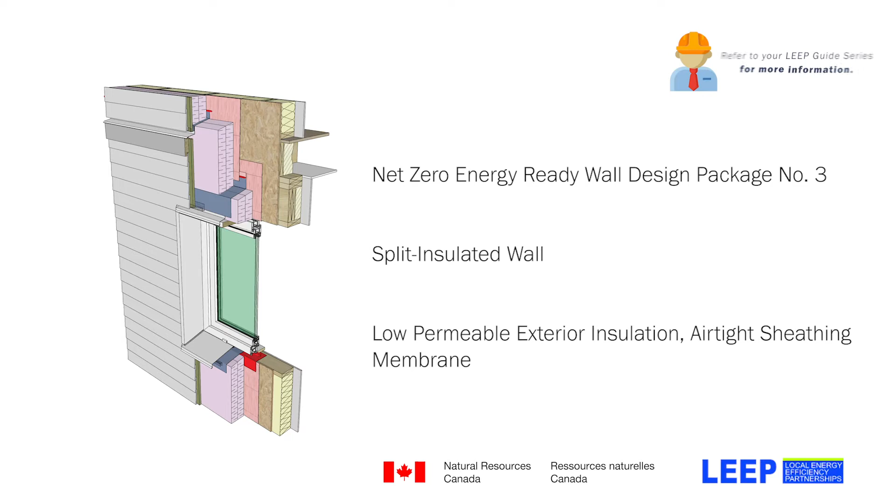So these guides, along with good process, all of a sudden, high performance is easy.

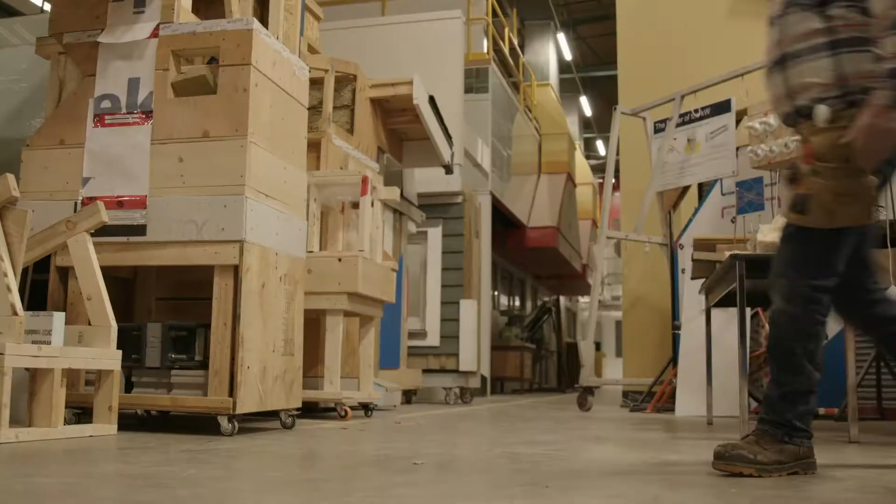You know, this rethink towards net zero is rethinking a lot of the traditional building enclosure assemblies and building them better. I get excited, but I also get depressed. I'm depressed because I'm old. And if I was younger, I would embrace this opportunity for this change. I see the young builders, and to me, I get excited for them.

Morning, Graham. Morning. Yeah. Hey, James, how you doing today? I'm all right, Graham. You?

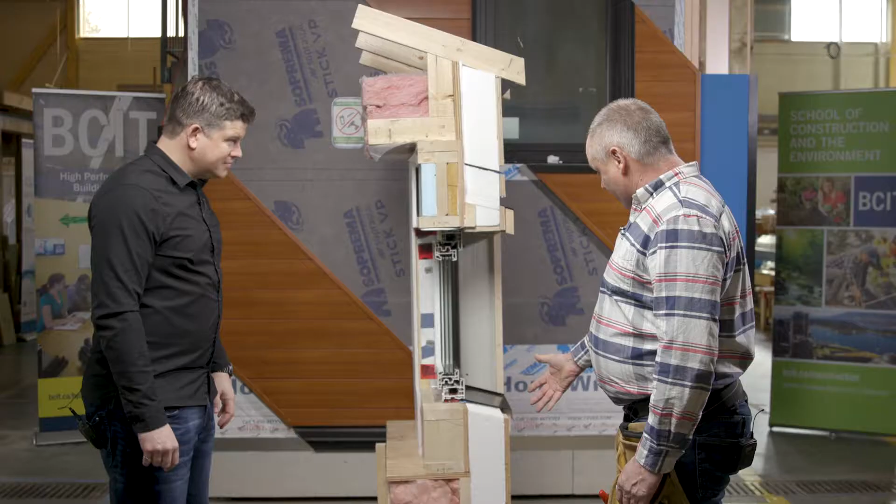Good, good. I see you built us a little mock-up here. I did. Can you tell us about it? Yeah. It's a split insulated wall assembly, pretty traditional. It starts with an ICF foundation, batt insulation on the inside with drywall and vapor barrier paint. So, you know, pretty traditional stuff.

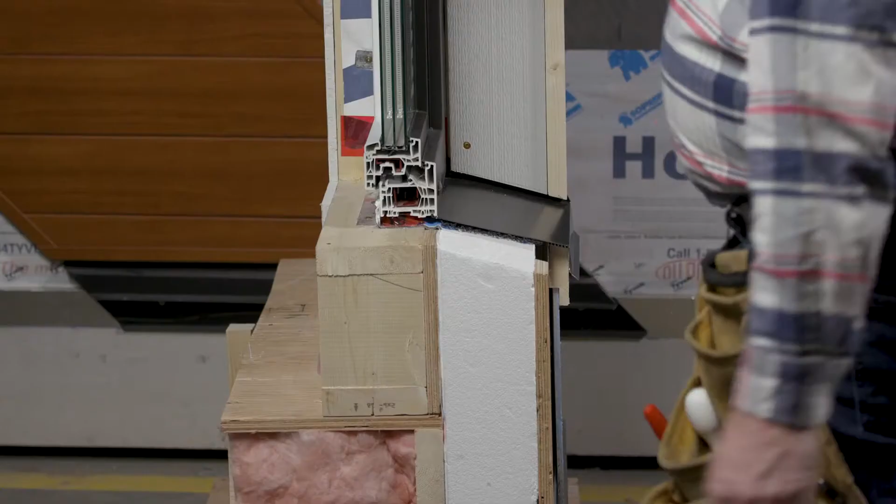2x6 framing. On the outboard side, I have 5 inches of foam. That's the split insulated assembly. The foam is grooved, and we'll get into that. But as far as the assembly goes, standard headers, and then I have a vented attic space. So again, nothing unusual. Same old wall assemblies, but a little more high performance.

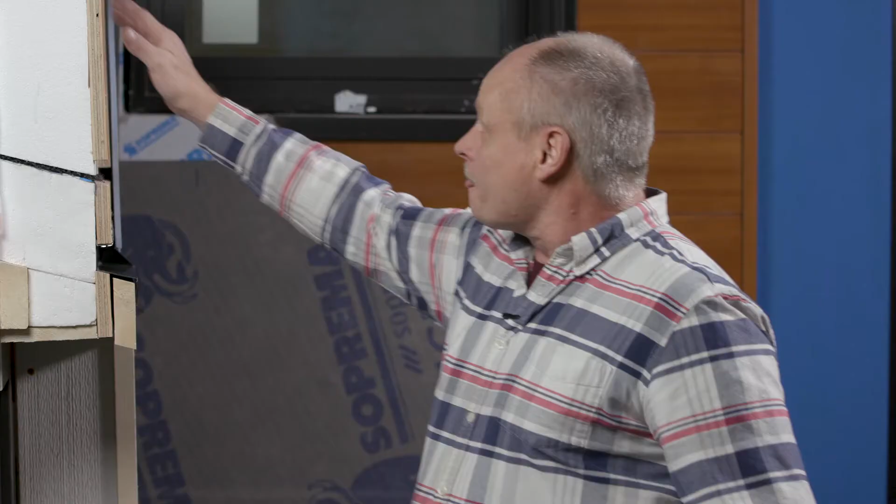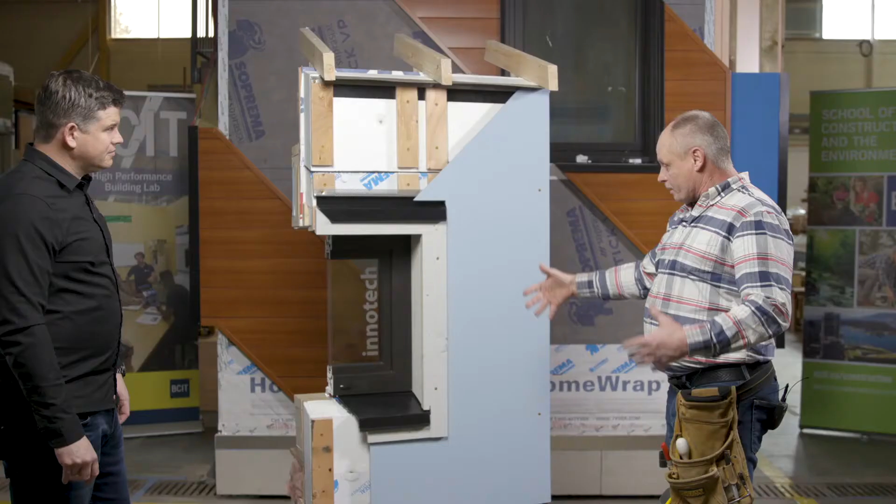Here on the outside, I have, let me spin that so you can have a little better look at what's going on. You can see it's just a rain screen cladding, strapping and cladding system. Pretty traditional, okay? And that's what I built for you to talk about. Great. Let's dive right in.

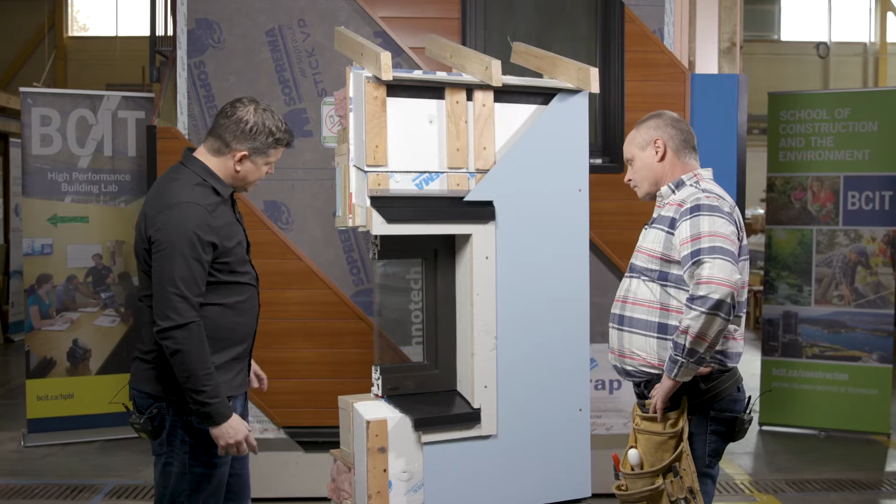Dive away. So we've got our LEEP wall system 3 here represented in this mock-up. And as you mentioned, we've got 5 inches of EPS foam or insulation over a 2x6 wall with a house wrap, air and water resistant barrier. Correct. So we're about our mid R30s, right about R35 or so for this assembly.

So from a water control standpoint, we've got our cladding, and we got our water shedding surface. And how are we controlling water with this insulation here? So a couple of things have been considered here due to the nature of the insulation and the wall types, and there's a whole thing that we can get into a bit deeper, but it's a traditional approach where I use a sheathing membrane, and that's the air and water control layer, okay? And the same thing applies, obviously, in the bottom half.

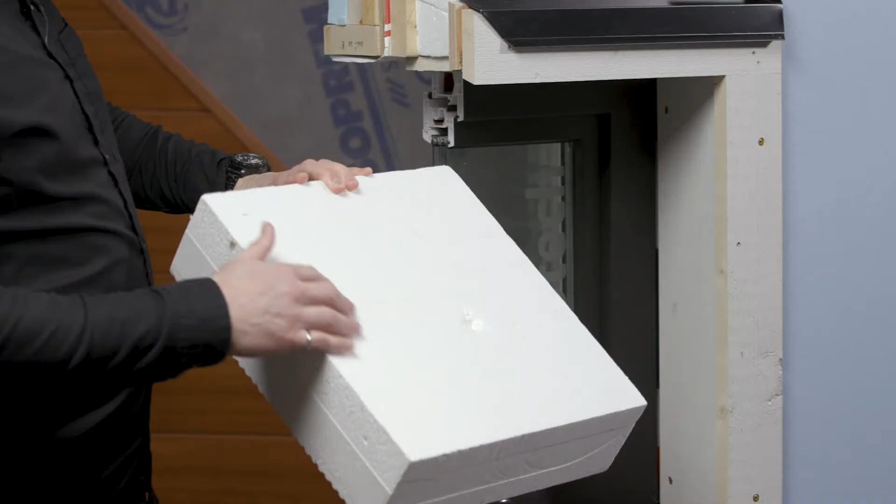The interesting thing is the insulation itself is actually grooved on the backside to allow for considerations of moisture within the wall assembly. Very simple. Do you want to show us some of that insulation? Yeah, I got a piece here, and there are many types, but that's it in its basic form. So we've got standard EPS, but we got grooves that are being cut in here. Lots of different types of groove patterns, but the point is just a place that can handle moisture.

Yeah. So what's unique about this assembly is we got a rain screen, but we got our foam insulation in our cavity over our house wrap, but we've got drainage behind the insulation. So if any water gets in during construction or in service, it can drain out. And you know what? There's other ways you can do that. Let me show you something else I brought.

If you don't have grooved insulation, you can use a very fine drain mat that would be attached to the wall and the insulation installed over. You can attach that with maybe stainless steel staples, tack it on, install the insulation. So the point is consideration to control moisture that could potentially end up behind there.

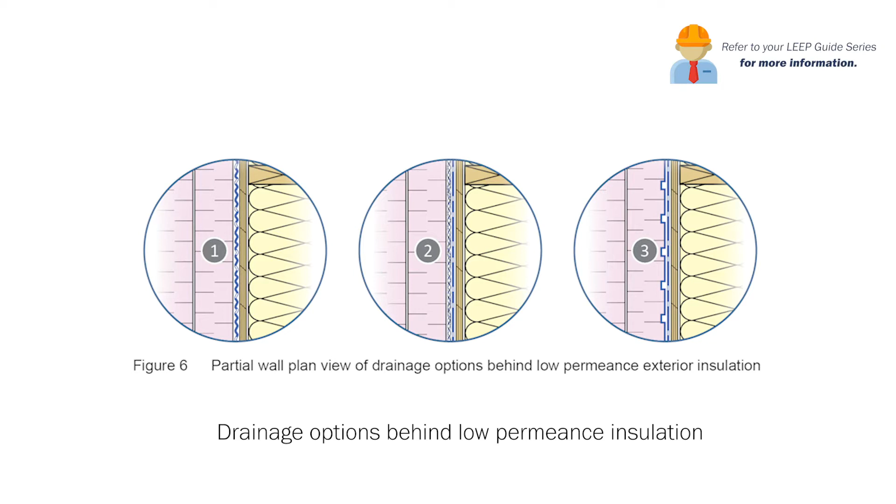And that's great because there are a number of builders that are concerned about putting foam plastic on the outside of wood framing, and this provides that buffer to allow an impermeable insulation to be drained and the water to get back out. Yeah, very much so. And there's just a lot to that, and I guess we're going to get into a deeper discussion on that, but how much are you putting on? Where are you building it? All this comes into play.

This allows you the flexibility to build a traditional split insulated wall with foam plastic. That's why I built this. Yeah. This is great. So when we look at this assembly here, we've got quite a bit of insulation on the outside. It's a lot, 5 inches.

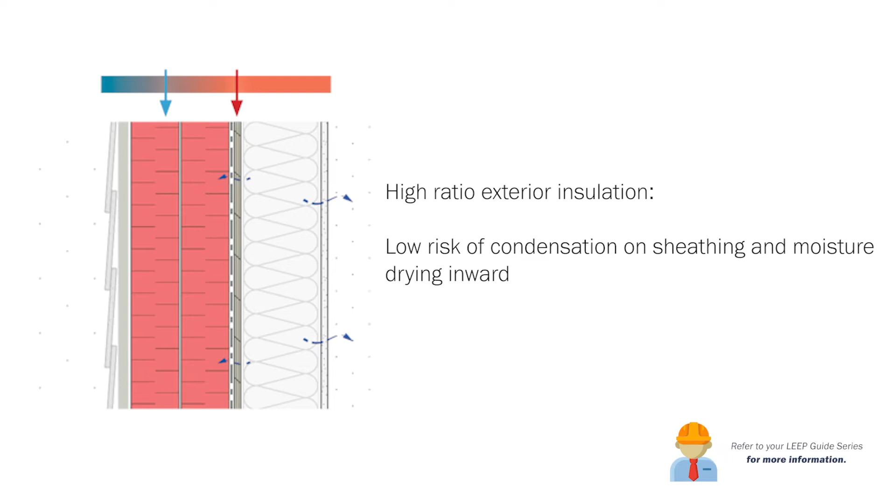Than, you know, a more conventional approach, maybe only a couple inches or so. Yeah. So we've got enough insulation on the outside here, so the ratio is quite high. We've got about R20 here and about R20 here, so we've got a 50-50 or so split. Yeah, exactly. Which in most places is going to essentially push your dew point into the outside of your wood frame assembly, but also keep the temperature here warm enough that you don't have a risk of condensation, and warm enough that it can dry out.

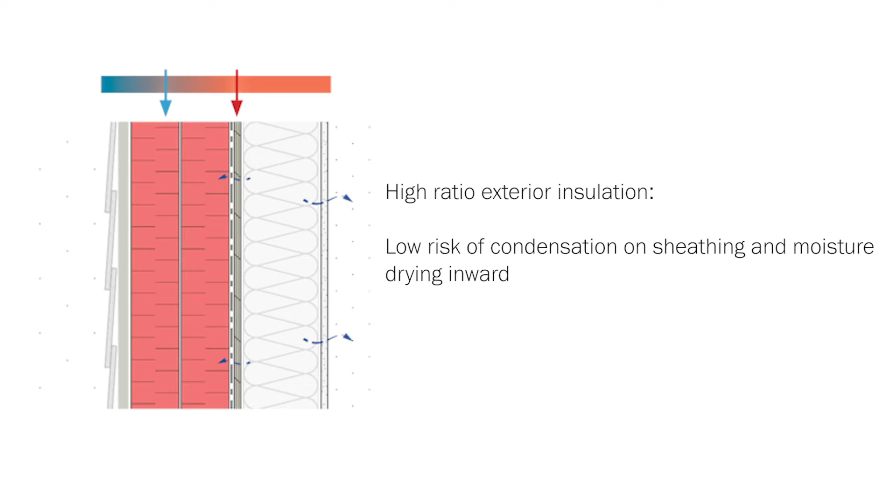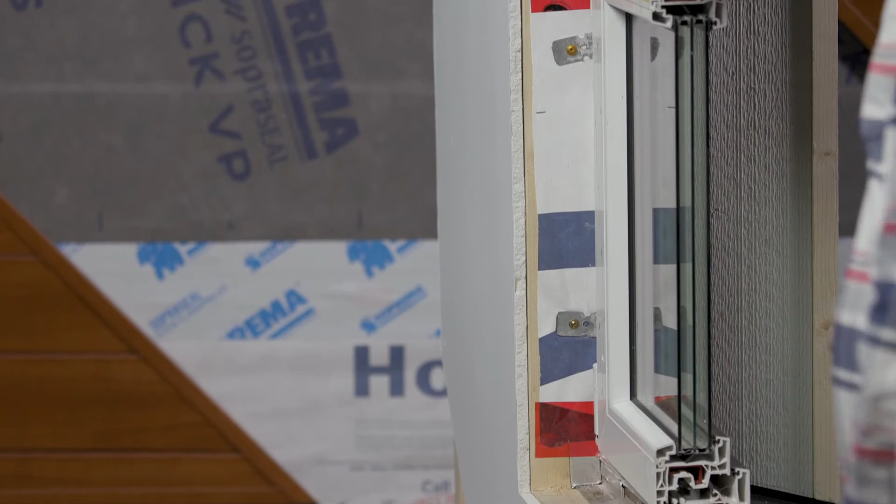That's correct. I also noticed that you don't have a vapor barrier on the inside. So what have you done here? On the back side of the wall assembly, you can see there's a vapor retarder paint on the gypsum as a measure of managing the interior to outside vapor drive. It also can allow some back drive and drying because it's a retarder. I didn't want to put poly in this assembly with foam on the outside. It's just not necessary, and it elevates unnecessary risk.

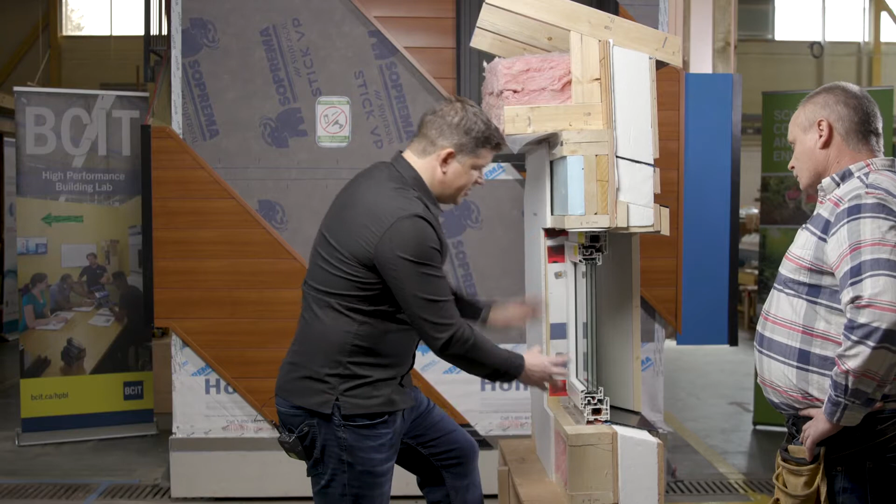That's great. So we've got a vapor retarder paint that controls the vapor diffusion through that assembly, but also allows it to dry back out. Yes. And what's really neat about this too, with this ratio of insulation, is we might not even need a vapor retarder anymore. Maybe. If we put in a bit more, or we're in a drier climate, we don't even need to worry about a special paint. This then becomes the control element, and the sheathing and the foam itself.

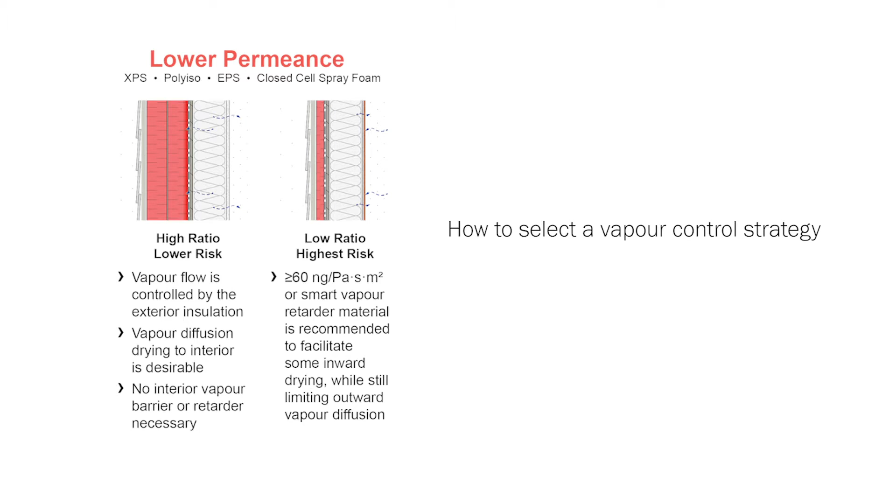Now, instead of vapor retarder paint, I've heard some concerns from building inspectors that they can't see it, so they want to see something. Is it there? Right. And poly is so traditional, but poly is the wrong thing here. You don't want to put poly on the inside of this wall with the foam on the outside, because if water ever gets in, it can't dry out. That's right. So there are other products like smart vapor retarders. Would that work here? That would absolutely work here. And it's an excellent point that if you can't see it, is it there?

One of the things about a vapor retarder paint is it's a function of area coverage. When people get paint, the traditional approach is to stretch it as far as possible. That does not work for vapor paint. It's a set area coverage per volume that makes its performance characteristic. So having a sheet good, a pre-manufactured smart vapor barrier that allows a little bit of drying and resistance in the directions necessary, is a good way to go, and a simple approach.

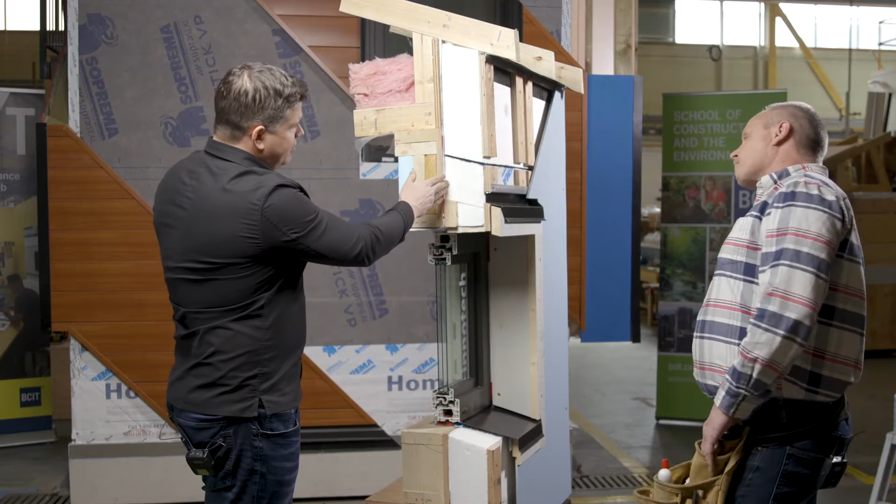Great. So we've got our vapor control, our insulation, and the air barrier in this assembly. I like how you've chosen a traditional approach. You've got house wrap, which is taped and sealed. You can't really see it in this mock-up, but we've got our house wrap as the air barrier, and the guide walks through all the details; all the joints are taped. The traditional approach for an exterior synthetic sheathing membrane. So house wrap's a good choice, and we'll get into some of the details in a minute. But what else could you use here?

Could you tape the plywood in this case? If you wanted that air barrier approach, of course you could. That's a tremendously excellent air barrier. But when you put a synthetic sheathing membrane on, not only is it simple and requires less tape, you have a compressive element against it, and you really get a tremendous air barrier. So if you want to keep it simple, just use a synthetic membrane, in my opinion. That's why I built it this way.

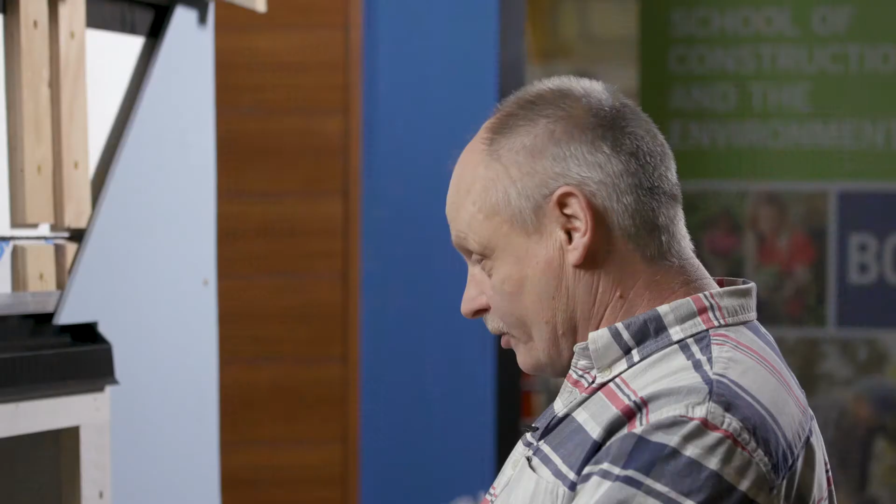You could tape all the plywood joints, but when you get down to doing that, you realize, holy cow, there's a lot of joints. It's not the same with the Tyvek. It comes in 9-foot rolls. You can cut it to whatever size you want and install it in a manner that minimizes the joints, because what leaks is the joints. The plywood's airtight, the tape's airtight. Exactly. The synthetic membrane's airtight, the tape's airtight, but you still get air leakage.

What's leaking? The joints, okay? That's right. Yeah, so we got house wrap, pretty traditional approach. We could use self-adhered versions. We could tape. We need water control back here, though. We got to remember that because we're potentially allowing water, and we've got that drainage. We have water control and air control.

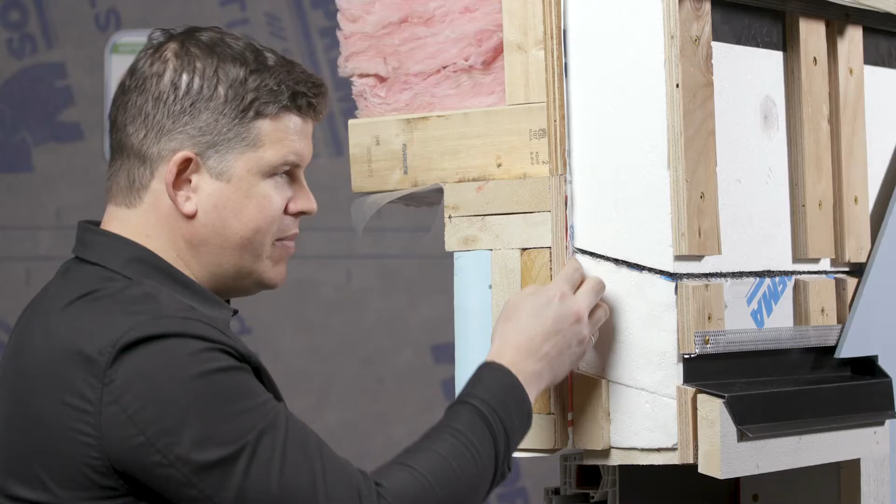And as we're detailing everything back here, we have flashings. We got flashing here above the window head, which we need by code. But not metal. And so that's code, right. I have this discussion with builders lots of times, they say, well, you got to put flashing in, that's metal. It's not metal. The code makes it clear that it is a membrane. Even understanding roofing practice, talk to a roofer, flashing is a membrane, not a metal, okay?

And you don't want to stick the metal through here for that thermal bridge. That's right. It wouldn't be necessary. It's also inherently difficult. The flashing is a water shedding element, okay? It's intended to bring any moisture that may come and bring it out. It's not intended to be stitched into your air barrier, because it's not part of the air barrier.

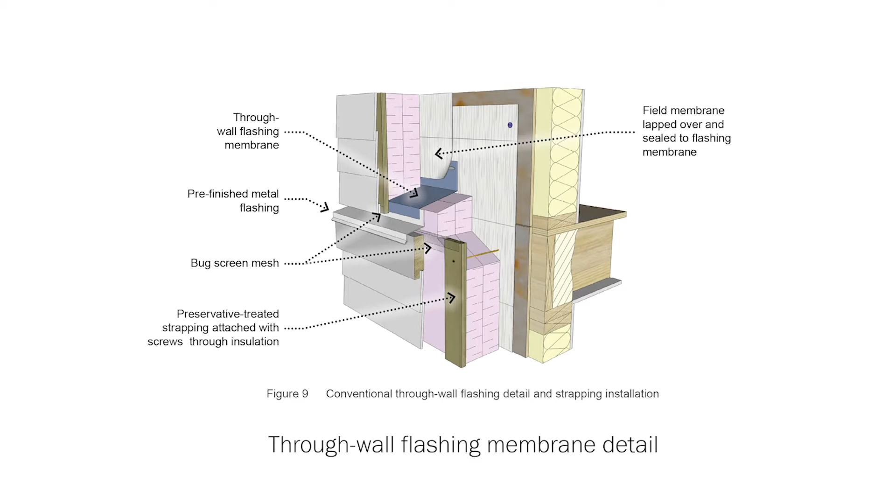It makes it way easier to detail this too. You put your air control layer on, run the membrane back over from the air barrier, so you're marrying membrane to membrane. It's a much simpler approach. Put the metal on the outside for the deflection, the back leg stops right here. And so that's why I built it this way. It was not only simple, I'll show you something.

It actually functions as intended. It's a lot of water. Wow, look at it come out there. And the water drains out. Wow. And so that's what was intended. That's amazing. That works really well, James.

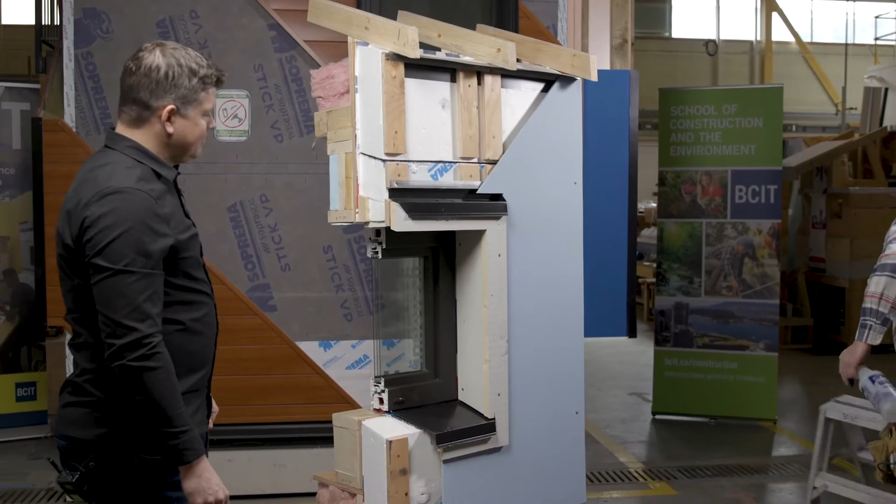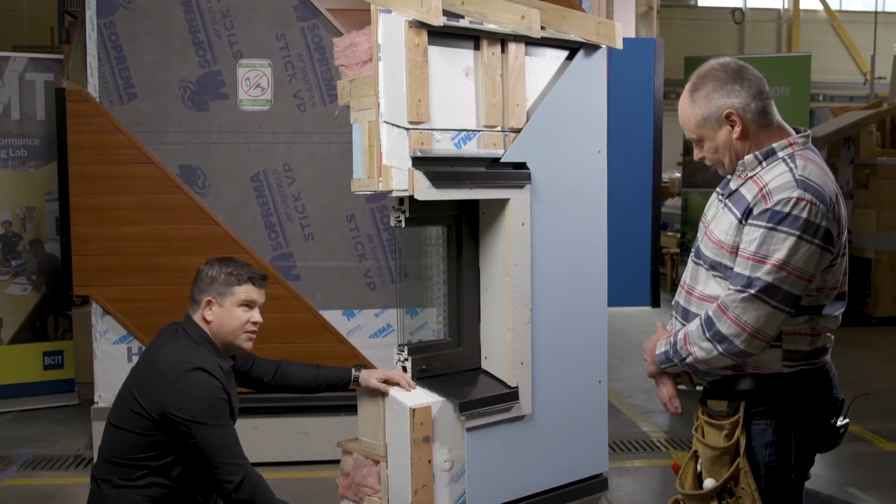So we've got our air barrier. We have other choices other than house wrap, but we have our air barrier here, and we got to think about the continuity, right? So let's start down in the grade here. Got our ICF foundation. With an ICF, what do you think is the most airtight? Well, you got a couple of things to consider when you do an ICF. They make waterproof membranes intended to go outside that foam, and that can be integrated into whatever your floor slab air barrier system is. We're not going to get into that, but you need continuity. Everybody knows that, right?

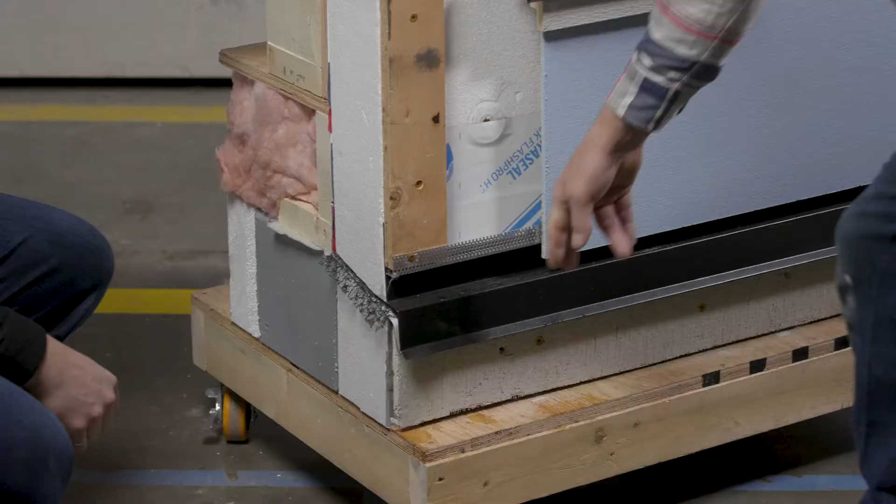So if I had a membrane run up the ICF, I could integrate that membrane with my air barrier here just by lapping. Flashing membrane, yeah. So we got our peel and stick. So we got our air barrier, whether it's the membrane on the outside or it's touching into the concrete here as well. So we got air barrier continuity from below grade to above grade on the outside, tracing it up. But there's one other consideration for ICF that must not be overlooked.

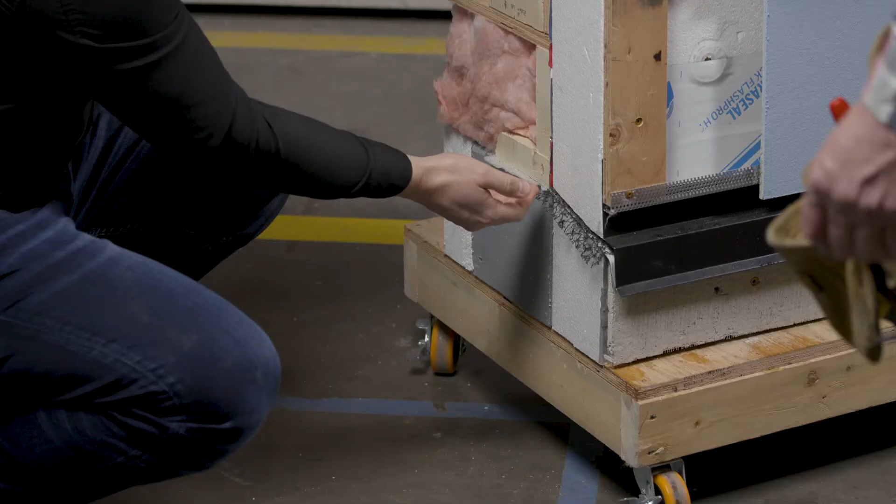If you don't have an appropriate waterproof membrane on the outside of that, you need to lock to the core. The concrete core would be the airtight element, okay? You need to actually have a bit of lap in there, or potentially even pull the framing back in to get a seal right to the core. Run the membrane through, whatever you need to do to make that connection from the foam back out to the outside. But when you build these types of walls, this assembly or any assembly, you need to be able to track those barriers.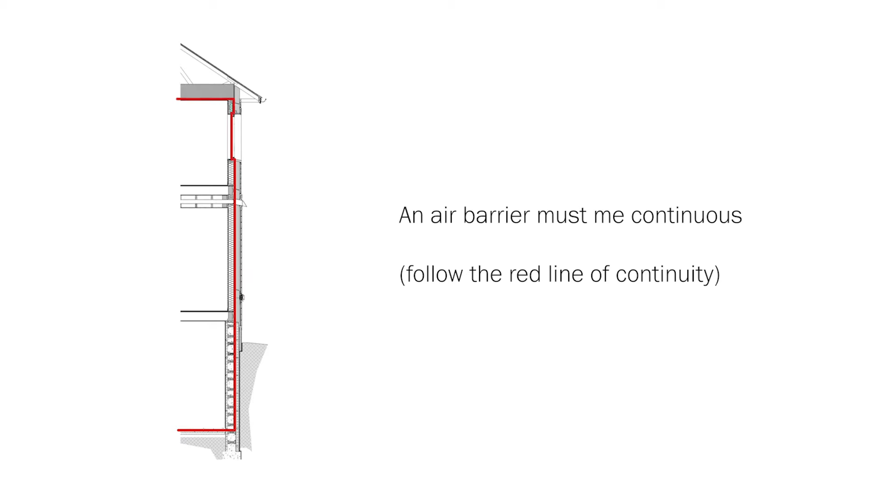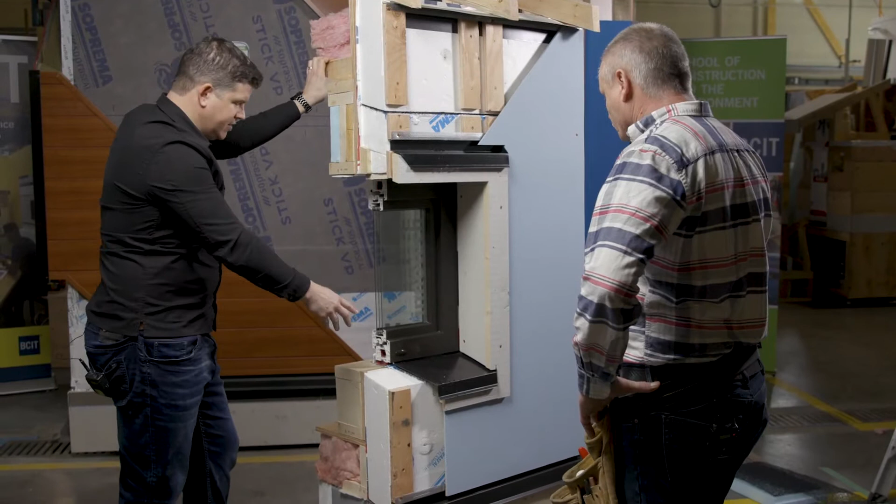So we're tracking the barrier up. We'll get back to the window here in a minute with the window details. But the air barrier from the wall goes into the window. It goes into our back dam, goes through the window itself, up through. And it's connected here with sealant at the back. Yeah, it's very important, you seal that up. And we'll get into some of the alternates here in a bit because there are a lot of questions about window details and what's the best way to do the sill with exterior insulation. We'll come back to that, and the sequence of construction. Yeah, definitely.

So we've got our house wrap through at the head, the sealant up to the head, up here. And so what's going on up here? I noticed we got some tape. So, you want me to get into this? I'll get into this a little bit then. Okay, let's get into it.

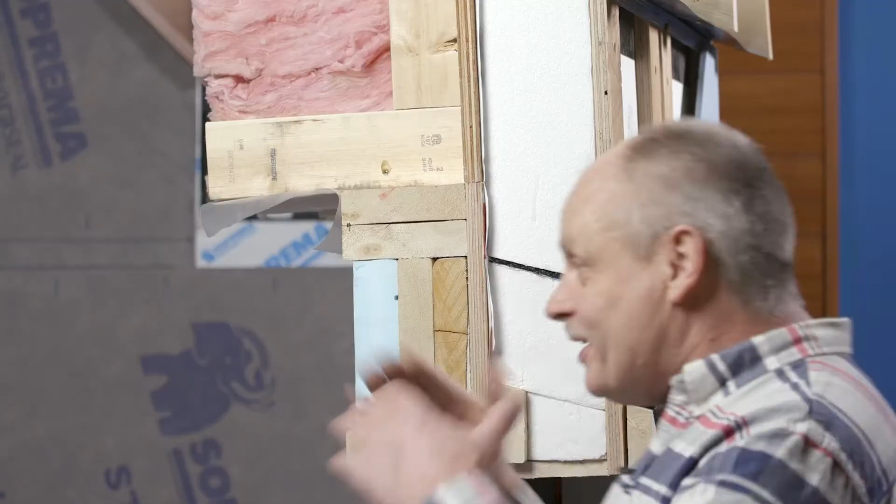So, when you need to transfer an air barrier from the outside to this on the inside, to the poly by default, PVD as I like to call it, the PVD here, because you have a vented roof, this is your air and vapor control, which must connect. So these two must connect.

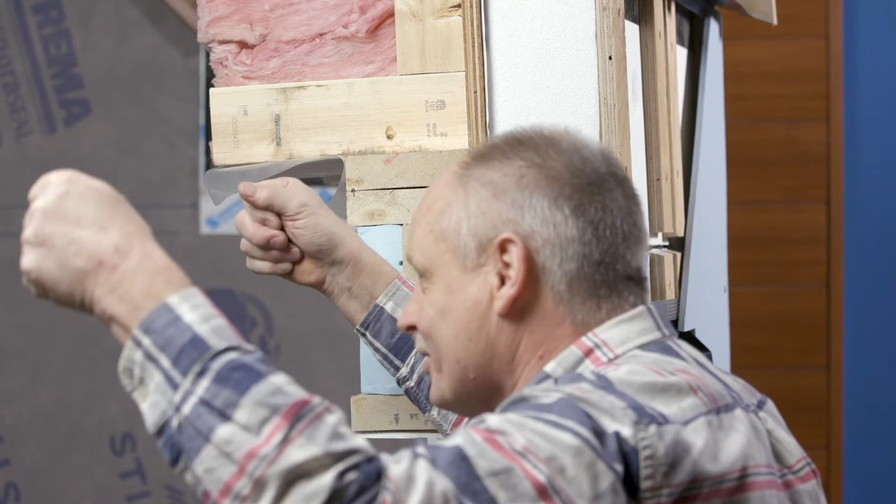This piece of wood, do you think you could blow through that if I held up a 2x6? Could you make my hair move? I think you could, with a hair dryer, okay? But you can't blow through this plate. So if I can connect this Tyvek air barrier in this case to this plate, I have a connection. How do I do that? I take a high performance tape. This high performance tape would come across from the plate, across here, and down like this.

So you definitely have to do that before the foam's on, right? Well, yes, and the key: I can't tell you how many times I get a call to give a hand, and I come to the site and the trusses are on. It's too late. You need to install this while you're waiting for your trusses. And what's really interesting about sequence construction is when you're waiting for the trusses, you have this built-in scaffolding around the inside, all ready to go, because we don't walk the plates anymore. At least I hope we don't, because safety's first, okay?

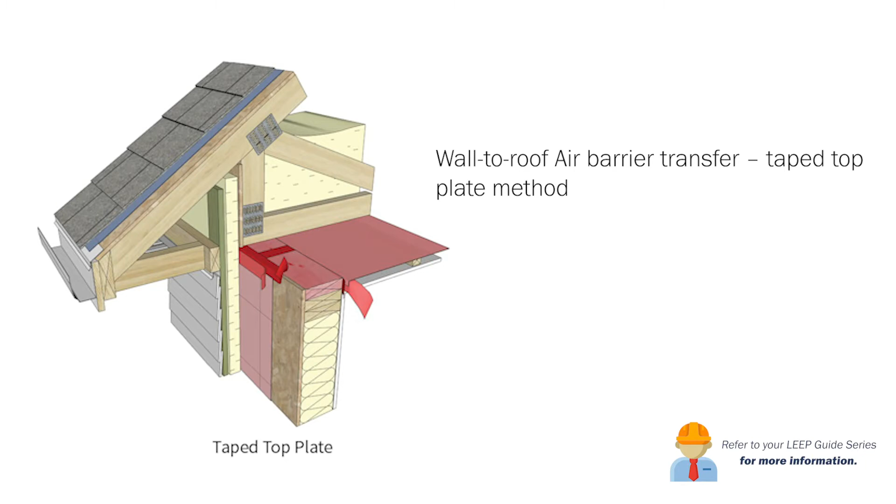And so you have the scaffolding. It's right here, your top plates. You can walk around with a high-performance tape and in a matter of a couple hours ring that building. Just tape the top and you transfer from the plate right into the plywood. And then what do you do with the joints between the plates here? Then you run a piece of tape across each joint. So at the end of it, you have this monolithic top plate, all connected to the plywood on the outside.

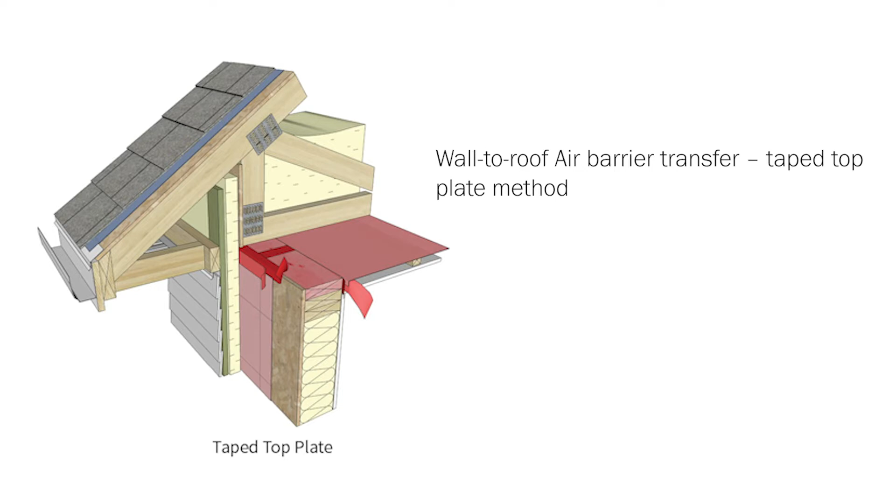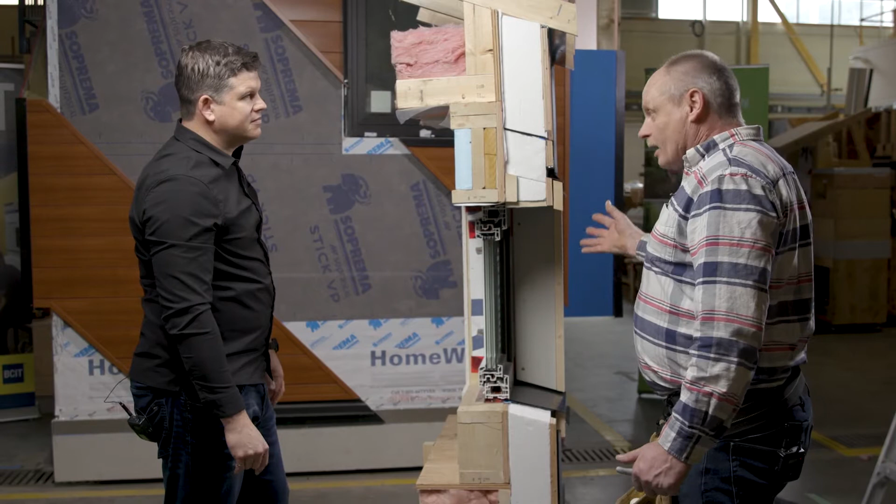So when you bring the Tyvek up, I can simply tape the Tyvek to the receiver tape, and I'm now connected across there. I had nothing in my way, no joists, no nothing. The problem is people always think about this after the trusses. The key to success of building this wall is just a simple plan. That's all we need to build a LEEP wall, because everything you see here is already on site.

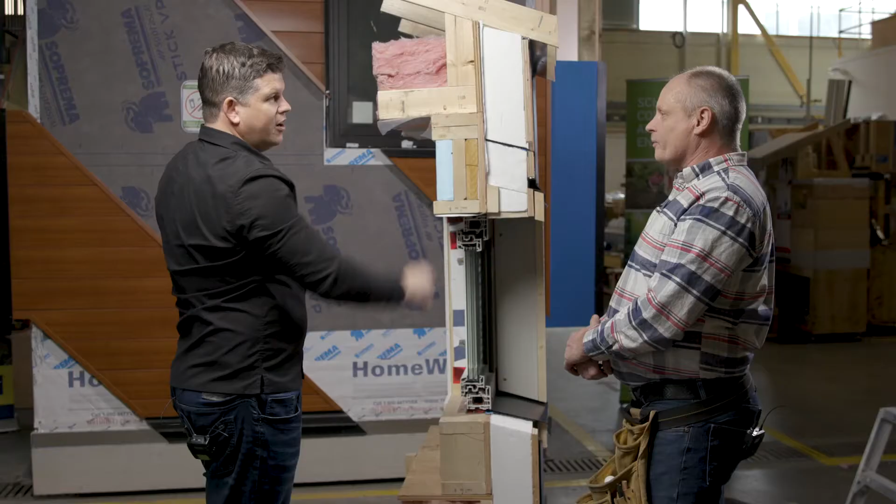So we got tape. Obviously we need a tape that might stick to damp wood. So pick the right tape, probably not the red tape. Red tape is a sheathing tape. It's made for plastic, not for wood, not for membranes. What if you put a piece of peel and stick across the top of here? I wouldn't, because I prefer to have as much drying ability as possible during construction. You can't judge how much wetness you get. The tape I chose here happens to have a 1.72 perm rating, it's covering a small area, and it bonds to wet wood.

So we got the tape method. Could do peel and stick; we don't necessarily need it. You could also transfer through with sealant here, but you have to get your framer to put sealant in between your sheathing and your framing. Well, let's talk about the sequence of construction then. It's hard to do, right? They frame in the rain. I don't know too many framers who are going to say, yeah, I'm all over putting sealant in there for you, big shooter. It's not going to happen, okay?

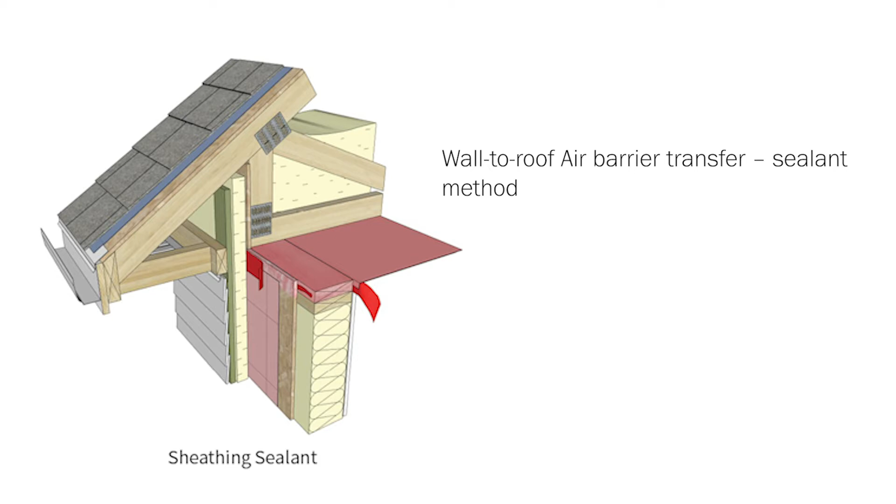Yeah. It can happen. It's a viable approach. I found, from my experience, the key to having success is minimize the amount of work that interferes with the framing process. Yeah. Get the building framed. Before the trusses come, make your air connections visible. Just think about it ahead of time. It's all sequencing, right?

Even the framers, here's a quick example. If you have a garage, it's not part of your air barrier system, but you come down a sidewall, how do you transfer through the garage to the other sidewall? Well, that back wall needs to be part of your air barrier. Here's an idea. Put 3/4 plywood, tape the joints. The homeowner gets a pegboard for all his tools, and you transfer the air barrier across. Just food for thought, right?

This is what we need to do, is feed the brain and think about it. And there's a few places on any build that you need to consider for that transition. Once that's learned, which is easy, it just needs to be done, this will all be successful. Great. So, got our air barrier transfer.

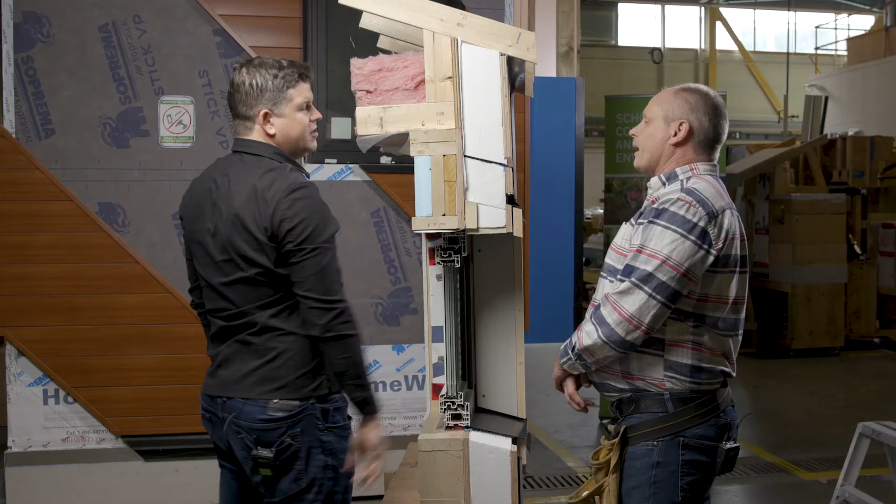I noticed we have a raised heel truss here, or a special truss that we're actually raising up to get insulation continuity here. That's correct, yeah. Which is different than past practices. It's a planned approach. How much you're putting here, you raise your heel appropriately. Which is great, but it means the air barrier transfer isn't coming up here, right? No. I do not need an air barrier in my vented attic, right?

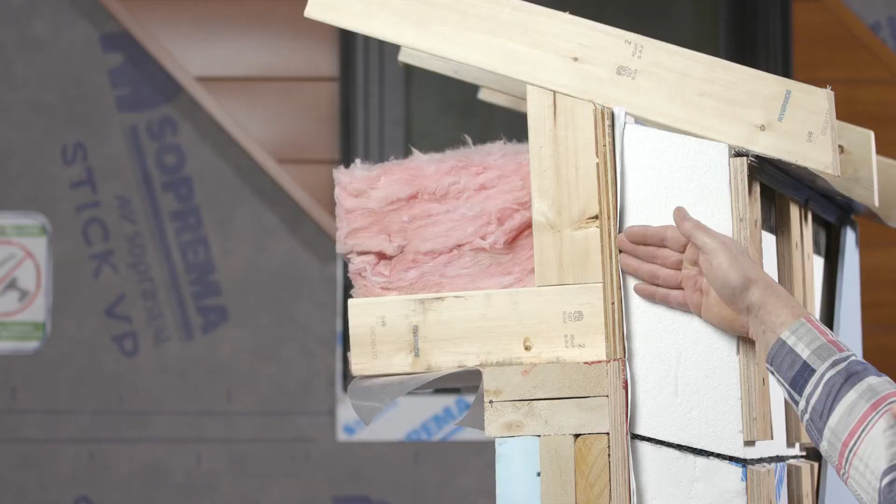Yeah. And so this Tyvek that I put on here, a synthetic sheathing membrane, is simply a function of a water resistant barrier. And it laps over the air barrier, which is also the water resistant barrier. So the WRB is continuous, and the air barrier takes what I call a left turn at Albuquerque and heads this way, okay? That's great. Well, it makes a lot of sense.

I mean, you got rain screen primary control. The face of that insulation sheds any water that's going to get past it. It's a little bonus layer that comes into that, okay? Separating your rain screen from your water resistant barrier like this, huge benefit for water control. Very little water, and if any does now, like you showed, it just drains back out. Yeah, it's an excellent wall.

Yeah, and then this assembly, because we don't have a vapor barrier on the inside, if moisture somehow does get in during construction, let's say, or a leak gets in somewhere, then it can dry back to the inside. So we've provided that buffer, and there's a space behind the insulation also.

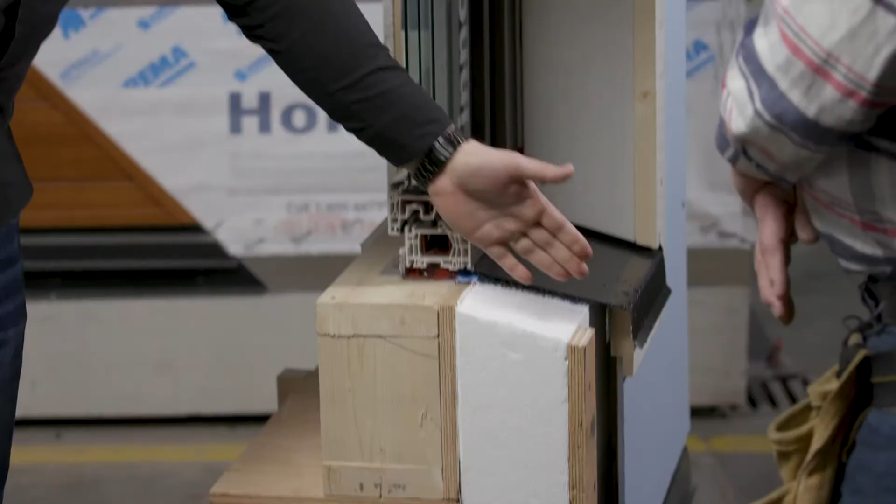Cool. Let's talk about the window detail here. So I notice you've got a pretty traditional installation. You're resting the window on the framing itself. You're not building a buck like we have seen for some assemblies. And the idea is I wanted to bring the insulation and the window as intimate as possible for continuity. Okay, but one of the things that's neat to consider is this window sill. It's intended with a waterproof membrane by code because there's the potential for water.

That's right. And if I have this water now, would it be okay to send my water down the groove? I don't want to do that. Don't really want to do that. This is a backup system, not a primary system. Okay? Yeah, unless you're showing off, it's just like, hey, check me out.

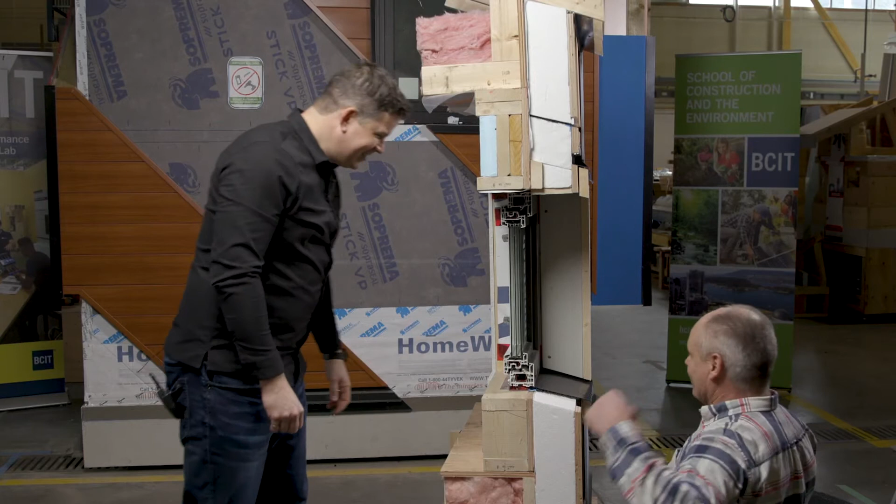No, you want to bring the membrane out to here. So any moisture that does accumulate here will trickle outboard, the same function as the wall assembly. Everything comes outboard. I didn't drain it down behind here and out the head. Yeah. And I noticed you nicely sloped the insulation because it's easy to do that. We didn't slope the sill here, but if you wanted to slope the sill, you could, right?

Yeah, you could. And one of the things that's really interesting, and I think changes are coming, I think the A440 is going to change a little bit, where the back angle is a requirement of many manufacturers now for these box type windows. Yeah. And it's fastened in through here, right? But these being typically about 1.25 inches high, they're high enough to resist the design pressures for residential assemblies, where you need 250 pascals to raise water an inch.

So even if your seal was poor, you won't get water ingress for the air. So there's a lot of benefits. Yeah, so we've got our rebate or non-flange window here. It'd be a lot more difficult to detail if we had a flange sticking in here, right? So a rebate window really makes this a lot easier to keep the insulation up flush and tight.

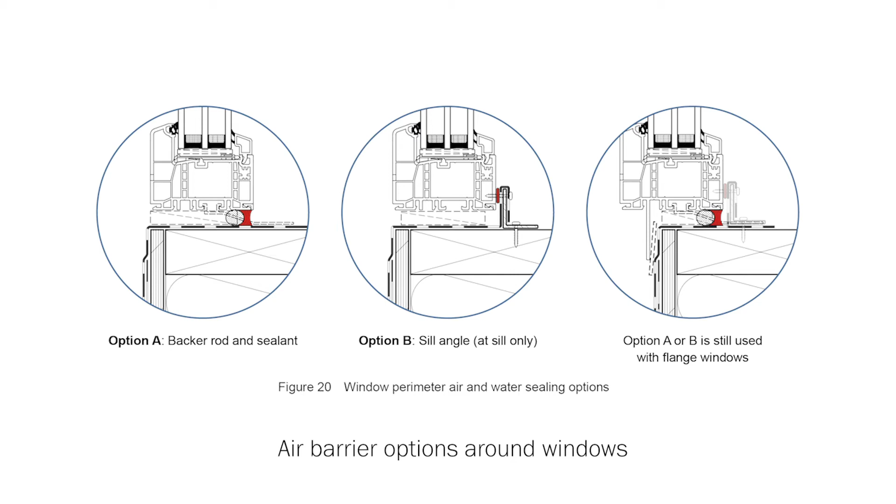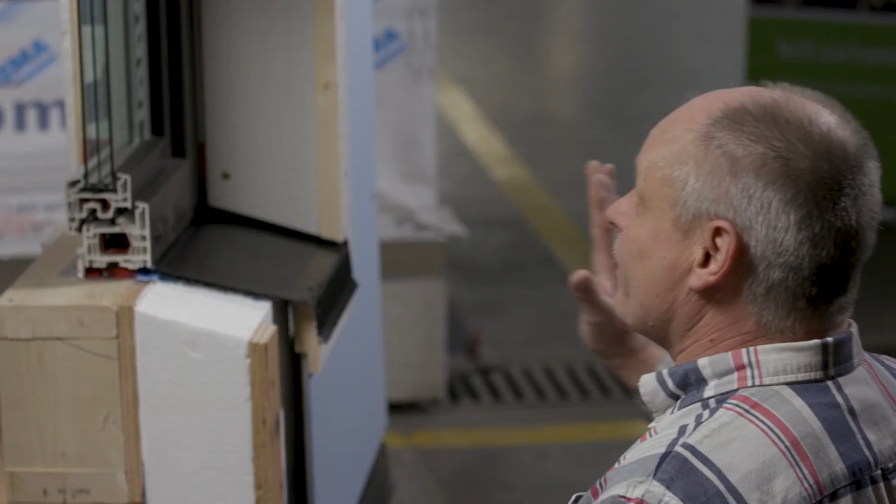It also allows the flexibility of coming in and out on the assembly. Yeah. It avoids the need to route out for the flange assembly and all the rest of it, and your subsill drainage and the rest that comes in with that also. It's much easier using a rebate type window. But if we still do it with the flange, no problem, you can do that. For this one that I built for you, I chose this approach. I find it a nice way moving forward because of my flexibility of where I can place this in the thermal plane.

So I noticed we got a sill angle on this detail. Yes. A lot of window manufacturers are wanting this now for attachment, so you don't put a fastener down through the sill. We've got clips on the jamb and the head for that attachment. You could also do a backer rod and sealant there. Absolutely. You can do that depending on your risk and how wet it's going to get, and the function of the install. When you don't have the back angle, you're relying on the integrity of that install. Period. With the back angle, I'm relying on physics. And physics always wins, okay?

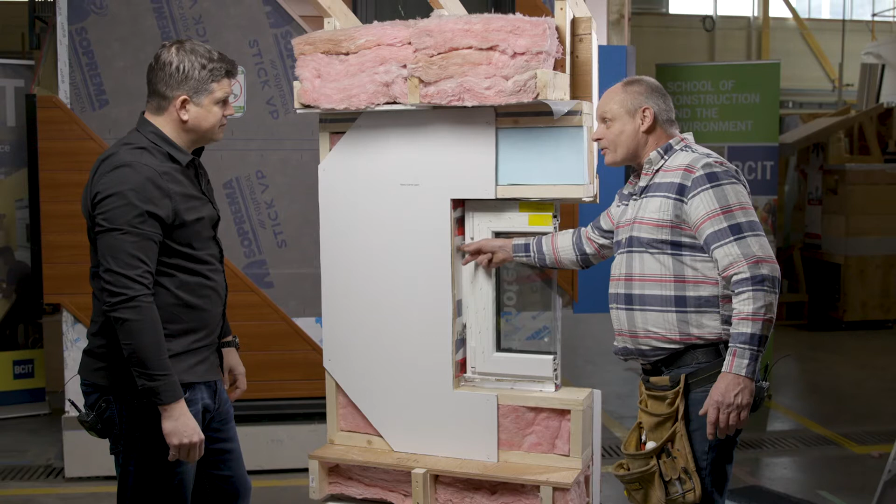But I want to go back to the clip. There's an important point with the clip that gets omitted or missed on many applications. The clips are a lovely thing. It's simple for the install. You plumb it up, this is really great. However, you then install the rod and caulking here. If I don't get sealant behind these clips, then I'll have a bypass for air leakage.

So when you install these windows, what I like to do is install the window with all the clips. Then I'll go back and only put one screw on each clip. Then I'll go back, undo the one screw, load it with sealant, put it back. Undo the one, load it with sealant, put it back. Then I'll load my backer rod and caulk it, and I'm assured to have that. So instilling a simple process is an extreme benefit, because that can really be an unfortunate thing that could happen.

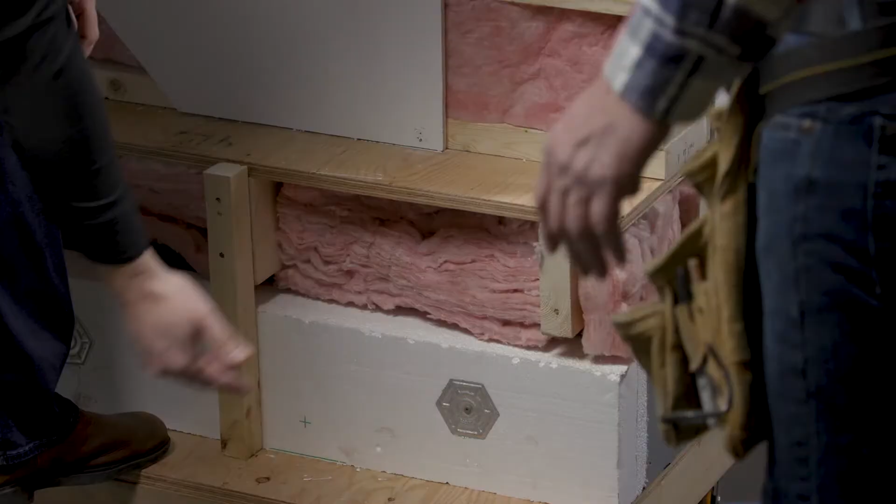One thing here too, I noticed we don't need a vapor control layer on the inside of this insulation here because we've got enough insulation on the outside, right? Yeah. And really we've got all the ceiling finishes and everything else, and then our built-up wood framing there. So this makes it a lot easier than trying to cut out poly or spray foam into your rim joist. You just put batt in there to match the same insulation level here.

So I got a question. You talked about the batt down here, and we don't need vapor control, but we have vapor control here. Can you explain a little bit about the need for vapor control? And on top of that, I have one other question. I chose to use 5-inch because I happen to have 5-inch, okay? But let's say I wanted to put 1.5 inches on the outside for this wall that I want to build. So between those two things, the vapor control and reduced insulation out here, what's the deal? Great question. I just saw that it mattered but didn't matter, and I want you to clarify that so everybody gets a sense of that, because I want to know.

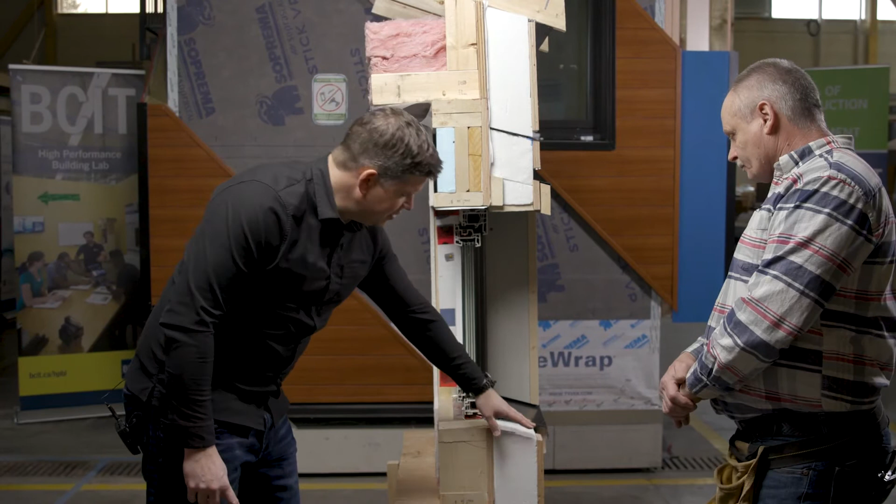So the need for vapor control on the inside of this assembly with exterior insulation depends on the ratio of the exterior insulation to the cavity insulation, right? And what climate zone you build in. And it's not only the ratio and exterior conditions, but also interior conditions: how humid it is, particularly in the wintertime, at the design conditions. So say it's -20 outside and it's 40% humidity on the inside, then you're gonna need a certain amount of insulation. If it's higher humidity, then you're gonna need even more insulation.

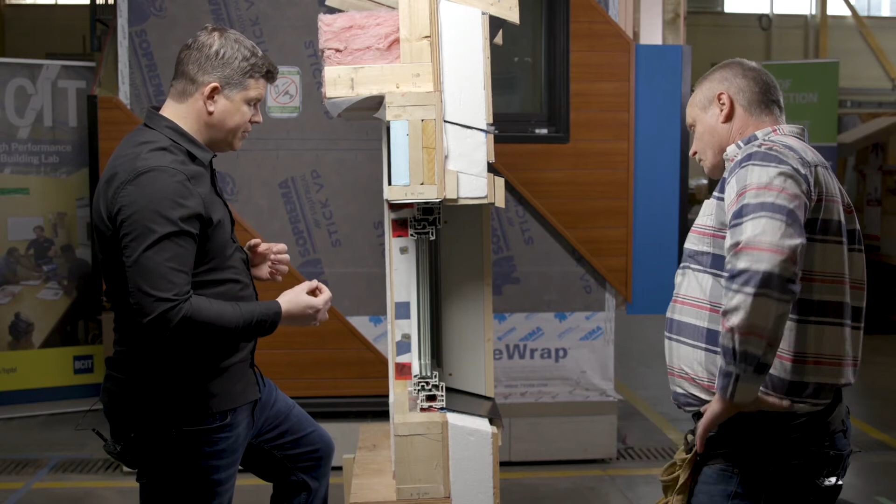So it tends to be that the colder it is and the more humid it is indoors in the wintertime at those cold temperatures, the more insulation you need. What we've generally found, in the past, we talked about 2/3 on the outside. So if we had R20, we'd have R30 on the outside. That'd be a safe ratio. So the 2/3, 1/3 rule.

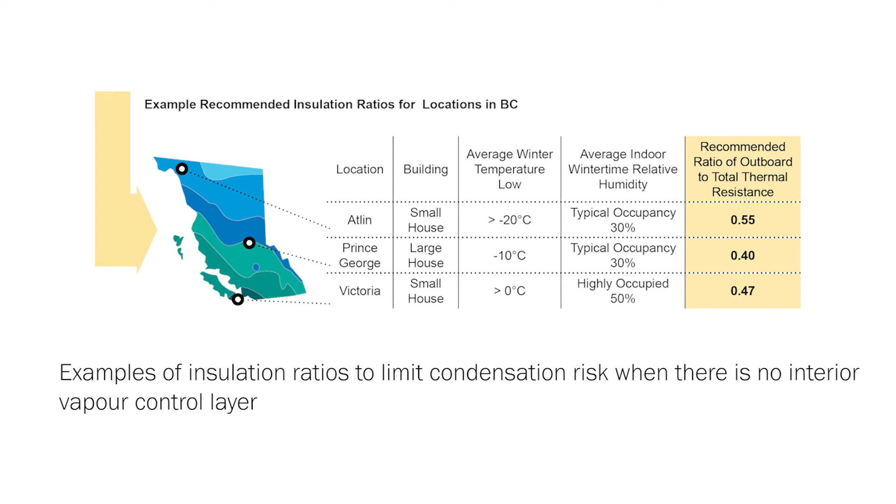Generally 50-50 for most construction, most climates, and also most occupancies, 50-50 will work. And once you exceed that threshold, you really don't even need much vapor control, if any, on the inside. So it's great that you showed the vapor barrier paint, but the interesting part is you really don't need that vapor barrier paint even with the ratio here. You'd only really need it if you had, say, 1 inch or 1.5 inches of insulation. So it's nice you showed it because we can talk about this, but with this ratio here, you're actually set up so that you have enough exterior insulation that the interior vapor control need drops.

And this is talked about in the guides in a lot of detail, looking at the type of insulation you have, the R-value ratios, and all these things we talked about, like where is your air and water control layer in this assembly. So because we've got enough insulation on the outside, we don't really need a vapor control on the inside for most occupancies. Now, if we had a high humidity indoor environment, or we didn't have quite the ratio, then we would potentially look at doing that.

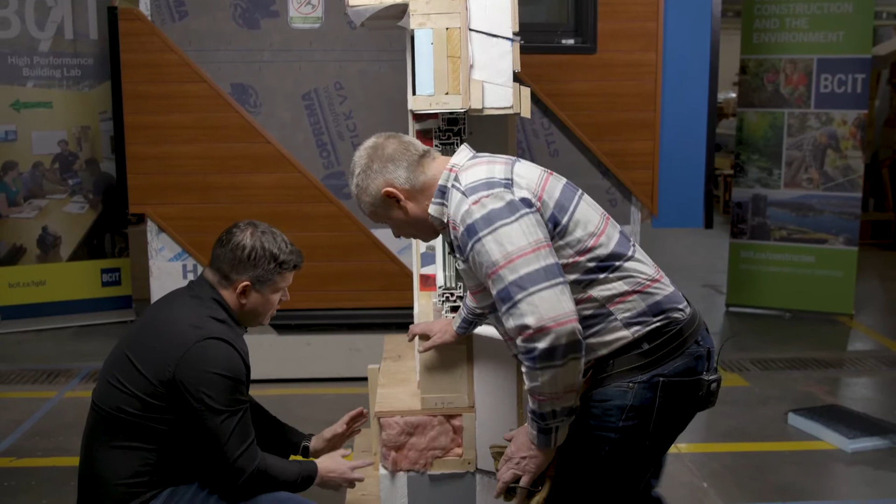Now, down here, we got a bit more insulation, so the ratio's a bit skewed. So if you look at this, what about a smart barrier just down here? Yeah, you could spend the time cutting it out and putting it in. Well, I tape it to the foam. What about just a small piece of foam? Foam's a good vapor retarder, so you could put 1 inch of foam in here, just some scraps you had left over from outside, shove it in there. Sure. The reason we use batt in here is because it's cheaper than foam, right? Yes. No, my question was on the vapor control. Yeah. And that understanding of the ratios.

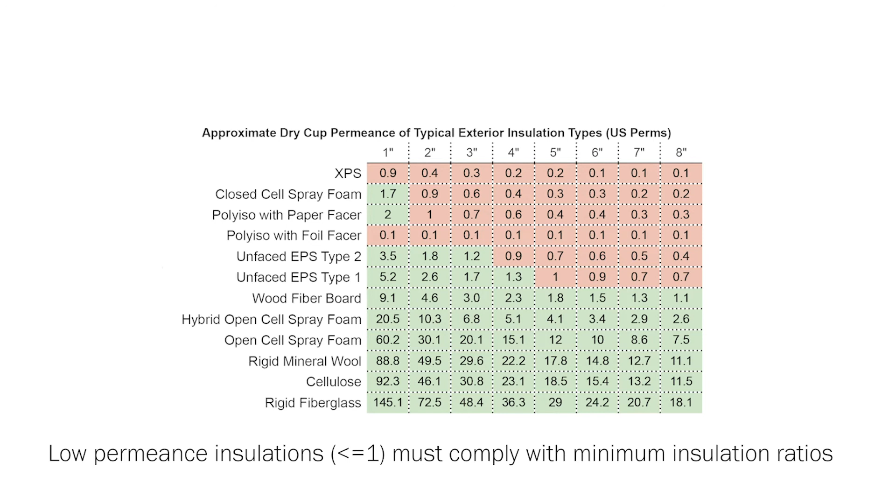I want to talk a little about the EPS in this wall. So we've used EPS, which is expanded polystyrene, and it's not completely vapor closed like a faced polyiso, and it's not as vapor impermeable as extruded polystyrene or XPS. When it's thin, 1 inch of EPS would be around 3 perms, so it's not completely closed off. And so there are assemblies where you could put no vapor barrier with EPS and you'd still be okay with the code. Although as the thickness increases, especially 5 inches here, this is impermeable. And once it's impermeable or pretty close, that's really where you want to be much more careful with the vapor control on the inside.

Now the good thing is, as we increase the thickness of insulation, that sheathing really never gets that cold anymore, and therefore the risk of condensation or high humidity in there is really stopped. Yeah, it just stays above dew point. Yeah. I'm a bit concerned. If you put a single layer on, what about gaps? And the potential, and that's why I was leaning towards a smart barrier on the inside. Yeah. I don't think it's detrimental. I'm not sure if I'm incorrect there, but maybe you can enlighten me.

But if you wanted to, like we have a lot of outside conditions that are redundant, would it make sense to consider a smart barrier until you got to extreme exterior insulation? Yeah, the smart vapor retarders in particular on the inside are going to keep any of that vapor from going through. Right. But if it needs to dry out, you can get some drying inwards. With the ratios you have here, the likelihood of air leakage condensation is quite minimal. Actually, once you add any exterior insulation, the risk for air leakage condensation drops. And in BC, we're really fixated on rainwater, and if water does get in there, having that high ratio keeps it warmer and speeds up the drying, actually.

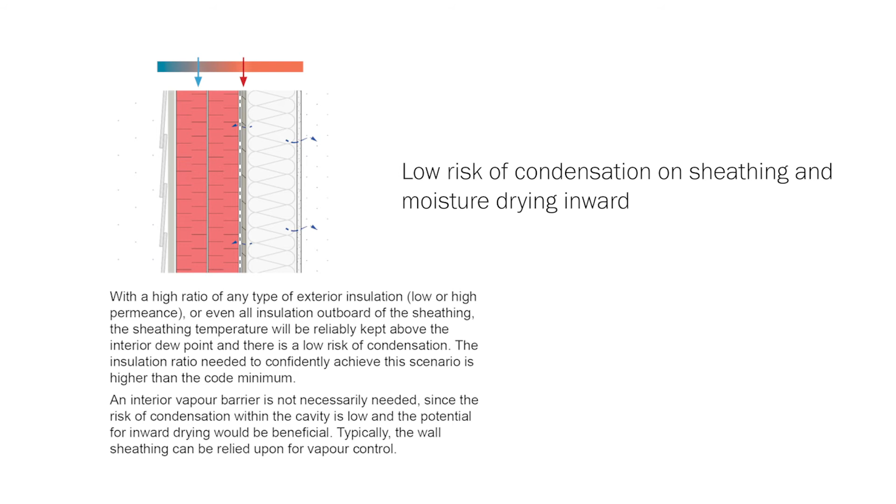And having that vapor openness on the inside allows that drying to occur. You know, it's kind of like the scenario if you had plastic on one side and it was closed off on this side and water did get in, the humidity just builds up in there and it can't go anywhere. And that's the fear that I think some builders have. So this assembly here has that buffer on both sides and allows you to use a lightweight, low cost rigid insulation.

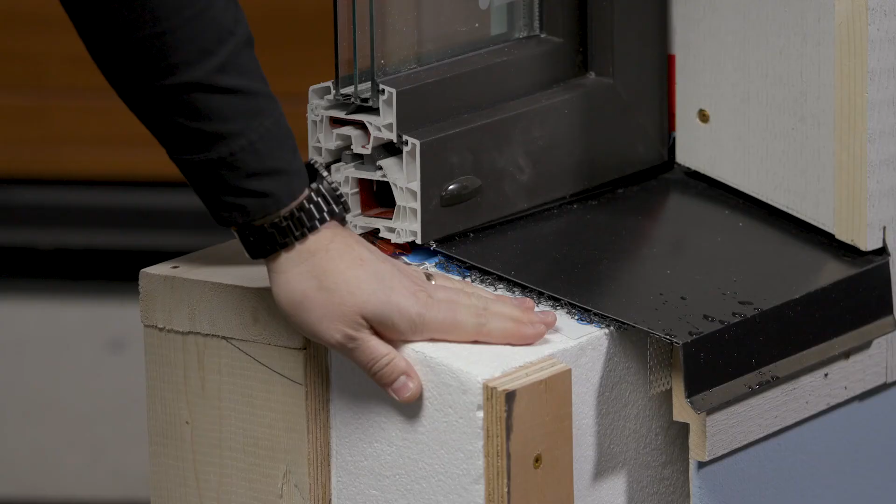The other thing I want to talk about with wall 3 here is this assembly allows you to use really any type of foam plastic on the outside. Foam plastic, EPS, XPS, faced polyiso can all be used in this scenario here. And the material itself doesn't have to be tested as an air barrier or water resistant barrier, right? So when we talked about wall 2 with the XPS, the surface of that insulation was taped and sealed, and those manufacturers had gone through the testing to prove in Canada that it will be a long-term air and water resistant barrier.

This approach allows you to use any type of insulation that's suitable for exterior application over a traditional house wrap. Yep. And the unique thing here, you either get drainage with drain mat or drainage with drainage grooves. Okay, so it functions well, and my takeaway here is it's a good wall, and be cognizant of the ratios that you use on this type of wall, and plan accordingly. That's great. That's a great summary.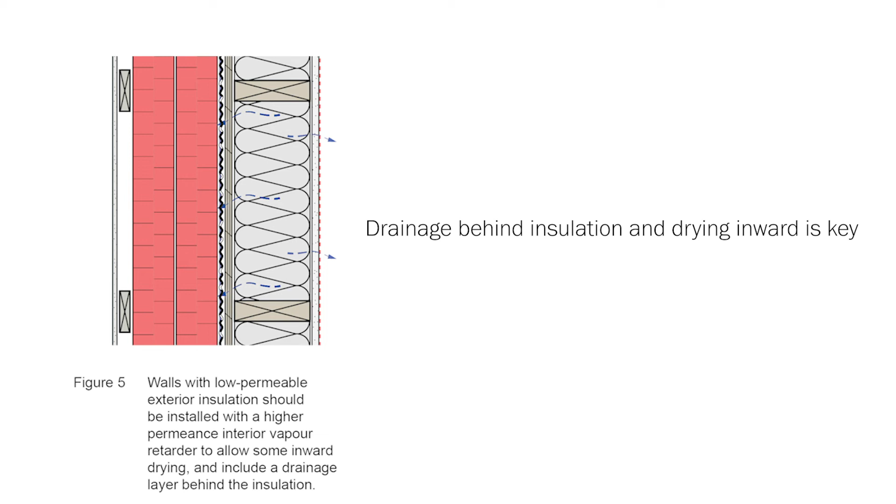Yeah, this wall can work quite well, and it's well thought out. I think the key thing here is you're thinking about the insulation ratio, the water control, and the air control behind the insulation. The vapor control is sort of thought out with the buildup of the insulation, and the guides walk you through all the details, from the roof to below grade and through a window, and really hit on the points of what we're looking for here.

And I think for builders, more insulation in this assembly is always going to be safer, especially as you're starting to use double layers and staggers for keeping even more of the water out. But it's the thinner amounts of insulation that you really have to think about. So if we're shooting for R30 or R35 to 40, it's getting a lot safer. Now, one thing you could do to improve that ratio is go back to a 2x4 instead of 2x6. Well, we use 2x6 now just to satisfy, in British Columbia, our building code requirement. It's not a structural requirement in most cases.

Yeah. So as a builder, if you had a client that wanted this window to be flush with the outside to match that older aesthetic that they're used to, what would you do in this assembly? I'd have to integrate a structural buck around the window. Yeah, you couldn't put the window on the styrofoam, right? No. You can't do that. Ever pick up a triple glazed window? It's a serious load, and it needs to be structurally supported, and those loads need to be transferred through your structure. It's a requirement.

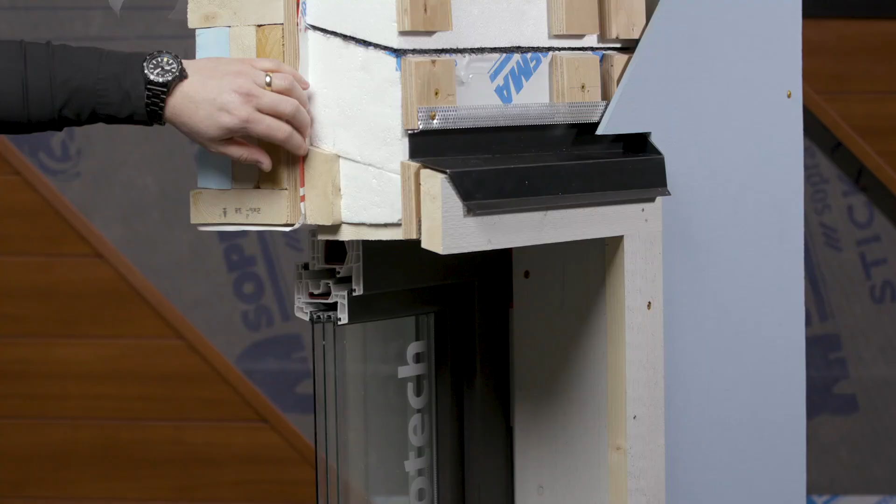So we're going to build a buck? And so we're going to build a buck structurally that can take and transfer those loads to the building itself and carry the load down. And there's lots of ways to do that. And if I had a buck, what would I do if my water control layers run into that buck? Probably want it sloped, right? Yeah, on the sloped buck itself.

Yeah. So I want to carry my barriers through my structure, because from the sequence of construction, that makes it simple. You can put all your barriers on and then add to it. I'll still integrate drainage above it, but I'm going to carry it through my buck. And the idea is to keep it simple. Don't have so many transitions. Cover the building with the control layers, and then build on top of that. Yeah. This has been a great overview of Wall 3.

Thank you very much, James. No, you're welcome. It came from the guide. I read the guides, and that's why I asked the questions about the bottom, because I wanted to talk about those ratios and stuff, because you've got to read the guides, you've got to understand it, and it can be very, very successful.